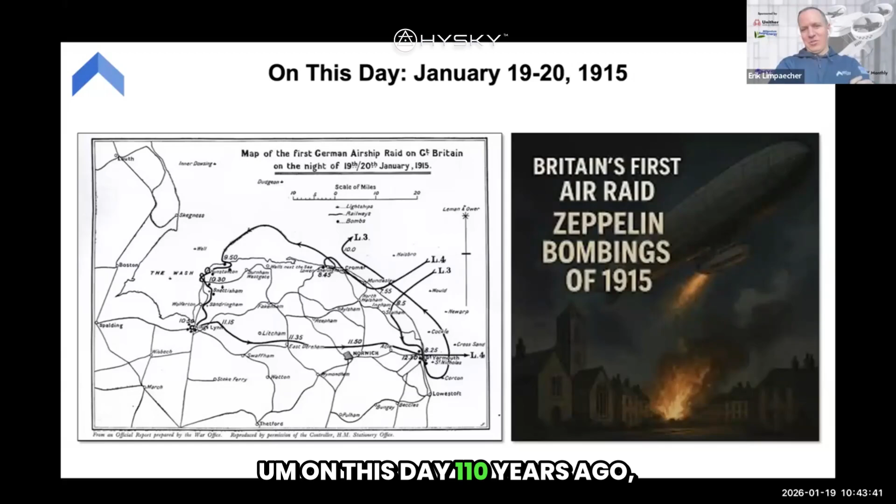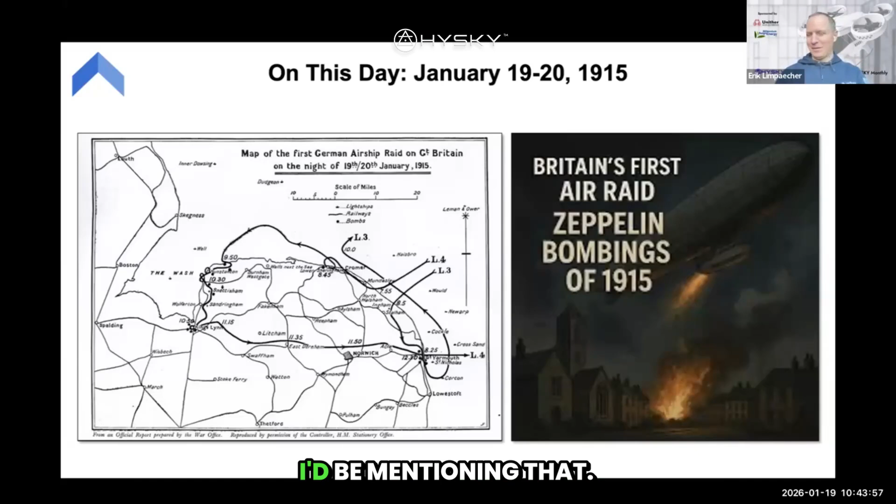And today is actually a pretty interesting, unique day in hydrogen aviation history. On this day, 110 years ago, was the first air raid on Britain from hydrogen-lofted zeppelins. So quite a coincidence, a little bit different than the MLK theme, given that we're focused on hydrogen aviation here. Thought I'd mention that. The use of hydrogen for lift gas has 160 years of history, dating back to the Civil War, where hydrogen gas generators were used to loft balloons for surveillance.

In the First World War, almost 6,000 hydrogen-fueled missions were carried out with these 2-person aerostats for artillery spotting and surveillance, and they transported the gas from French factories in these compressed gas cylinders. And then in the Second World War, the M1 hydrogen generator was used to loft these barrage balloons. You can see these over the beaches of Normandy. They were also lofted over Buckingham Palace in London during the air raids, checked against the aircraft, and they used caustic soda to produce hydrogen using these mobile hydrogen generators.

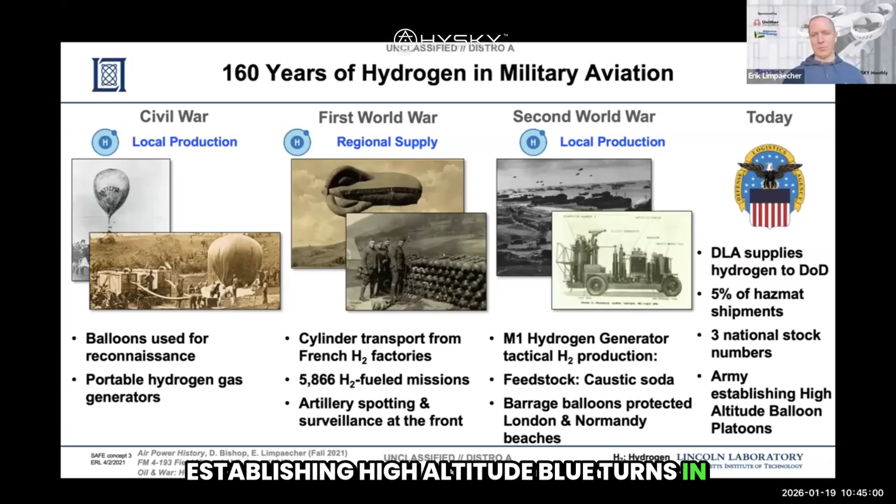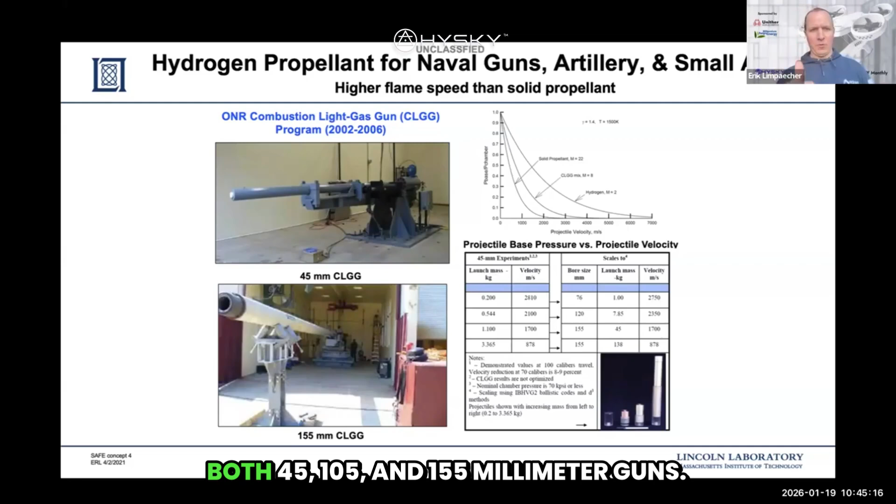And today, DLA supplies hydrogen to the DoD. It comprises 5% of all DLA hazmat shipments, and the Army is in the process of establishing high-altitude balloon platoons in both the Pacific and in Europe. But lift gas is not the only application for hydrogen. The Navy's developed combustion light-gas guns that demonstrated 30% higher muzzle energy by combusting hydrogen and oxygen for 45, 105, and 155 millimeter guns.

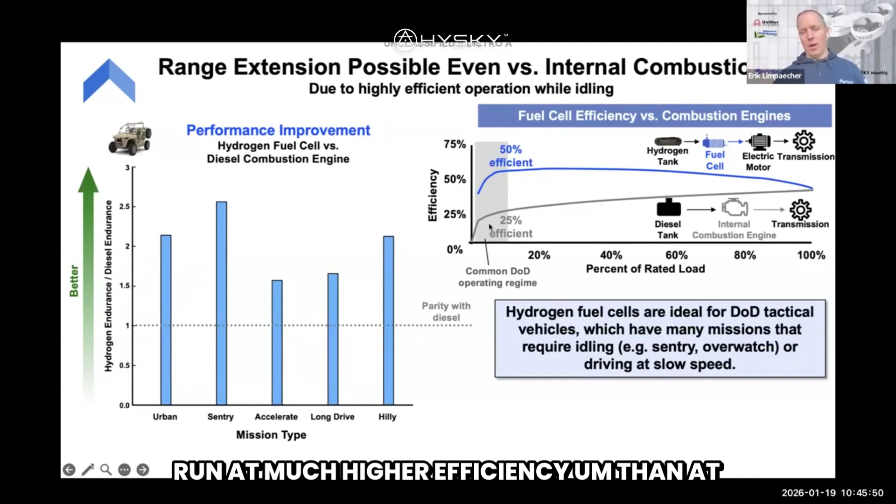Hydrogen has been demonstrated to provide significantly reduced thermal signature and acoustic signature compared to combustion engine systems. Through some analysis, we've also shown that hydrogen can provide significantly increased range compared to diesel-based combustion engine vehicles because hydrogen systems tend to run at much higher efficiency at lower operating load levels compared to combustion engine vehicles.

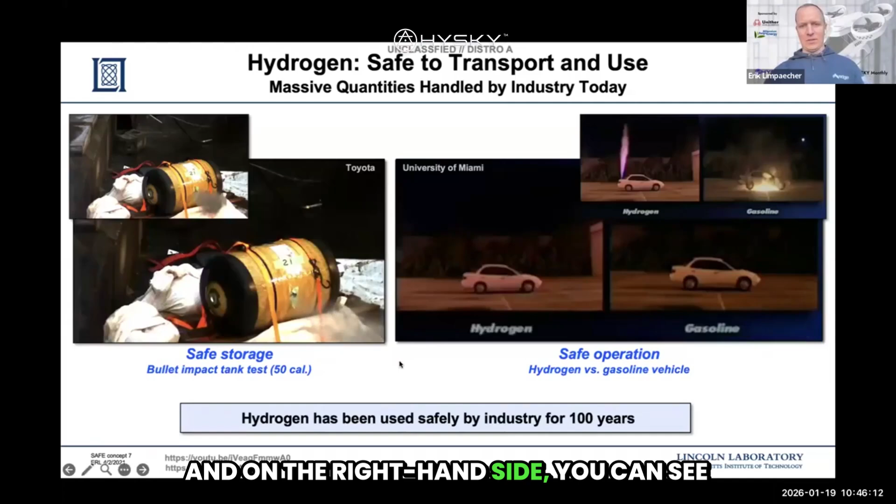Furthermore, hydrogen has been shown to be very safe. On the left, you see a video of a Toyota Mirai tank being struck by 50 cal, and you can see that the exhaust of the hydrogen actually prevents any ignition. And on the right-hand side, you can see some tests done by University of Miami showing that hydrogen, when handled properly, is actually safer than gasoline for vehicles. I'll let that video play for a second.

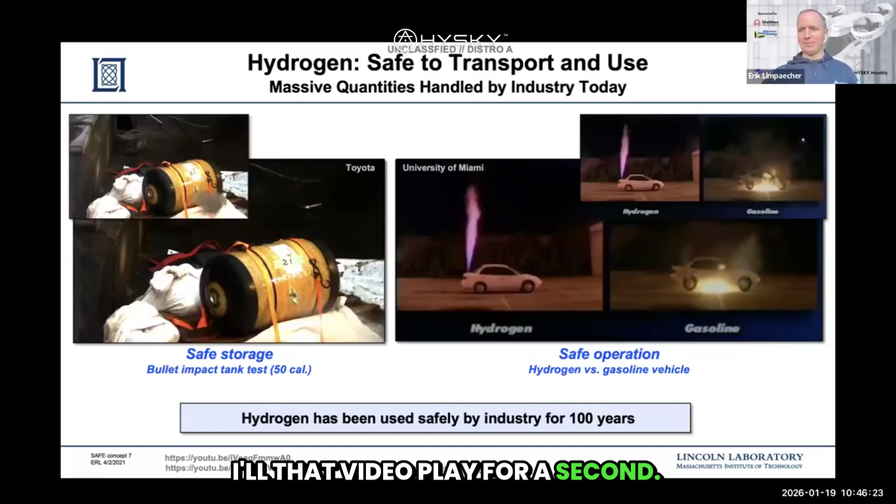As we look to other applications, as you all know, hydrogen has significantly higher energy capacity compared to batteries. So today we could see a 3 to 5, or further, 3 to 8x improvement in the flight endurance of UAVs. And I think it's interesting to compare that to the amount of improvement in battery energy density we've seen over the last 50 years. Right? Batteries have improved by 7x over 50 years, and today by switching to hydrogen, we could dramatically improve on the energy density of batteries.

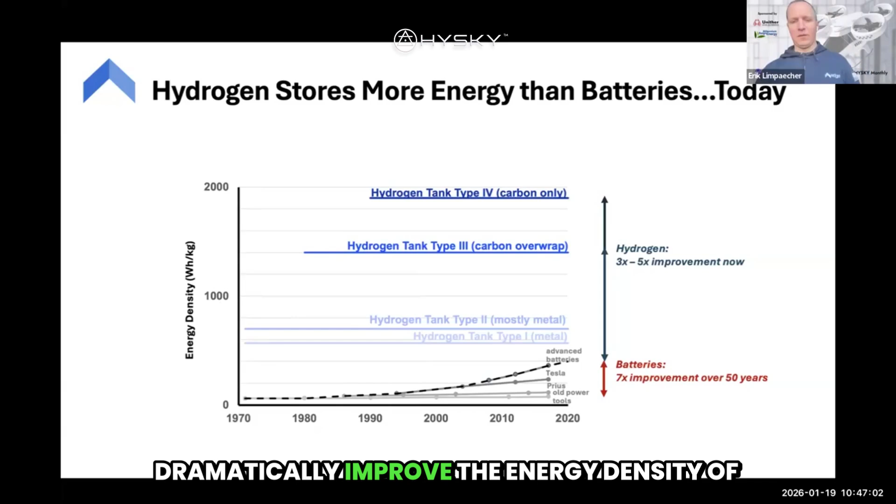Which is why there are so many companies developing hydrogen-fueled drones by removing the batteries and using that same battery electric powertrain to fuel hydrogen electric systems, as well as a pretty robust ecosystem providing battery to hydrogen conversion kits for primarily Group 2 and Group 3 UAVs. I've actually seen IAI and Skyton converting combustion engine Group 2 and Group 3 UAVs to hydrogen to improve maintenance and reduce acoustic signature.

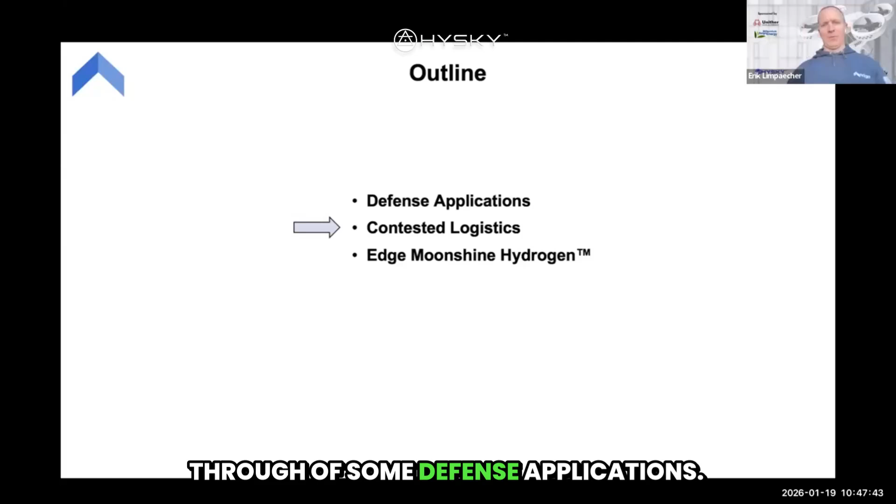So that's a quick run through of some defense applications. We've seen a lot of interest from Special Operations Command and the Army in contested logistics. And the basis for that is that petroleum has historically been a challenge for military operations and is frequently the first thing targeted by the adversary.

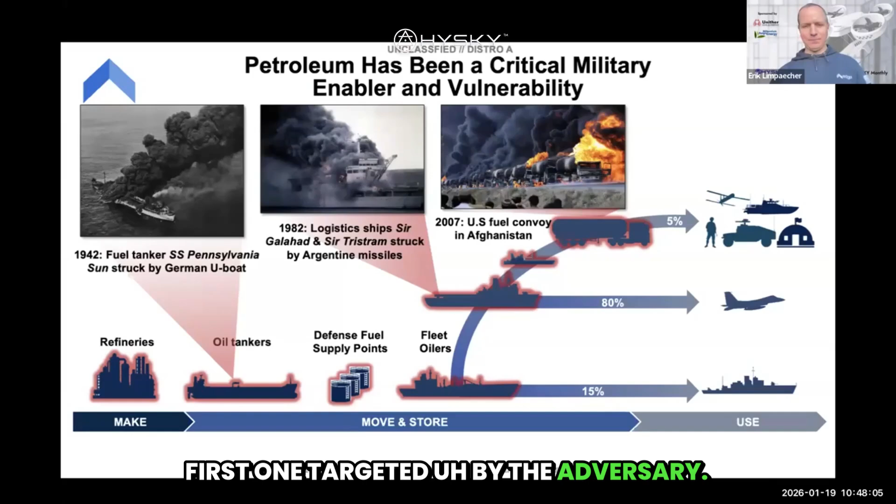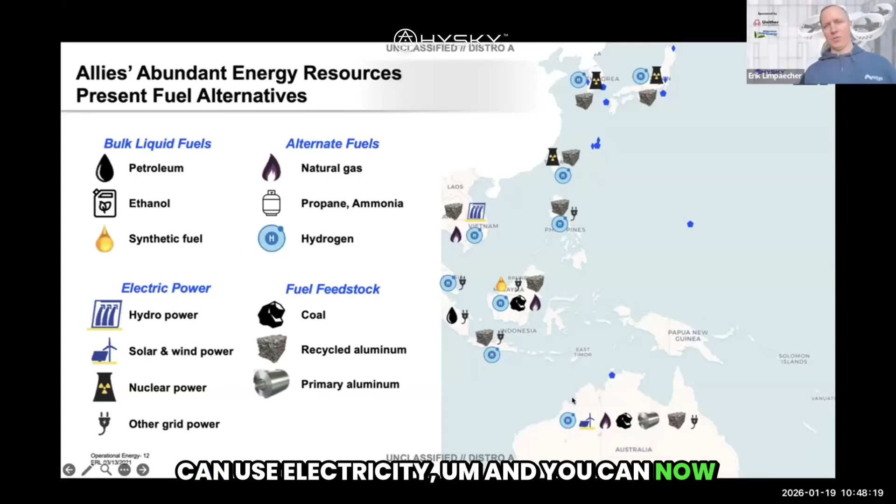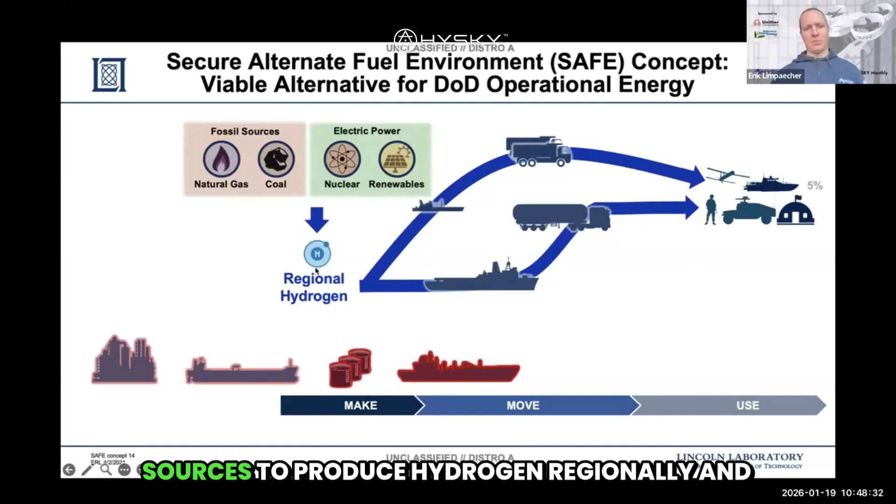Good news is that there are many other sources of energy in places where the U.S. military might want to operate, and many of those can be used for producing more hydrogen. You can use coal, you can use natural gas, you can use electricity, and you can now also use aluminum. So a potential solution to contested logistics is to use locally available fossil or electric power sources to produce hydrogen regionally and then transport it, or, operating at the tactical edge, you can now take aluminum, mix it with water to produce hydrogen on the spot.

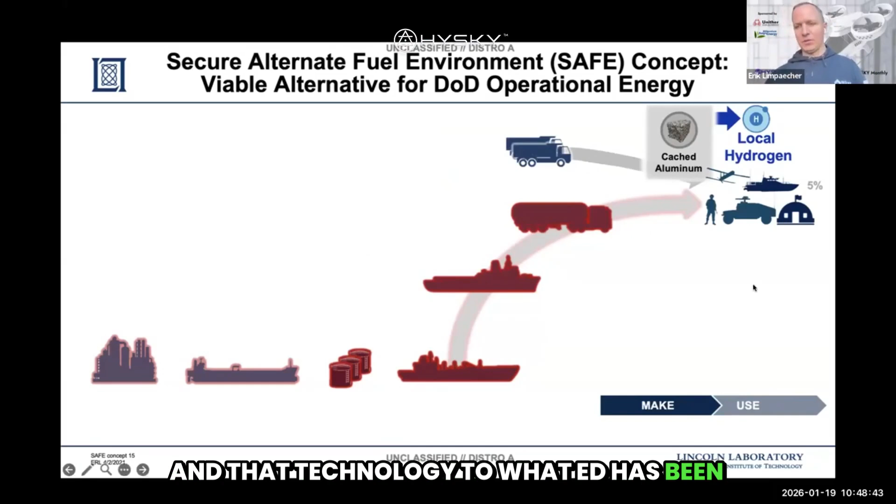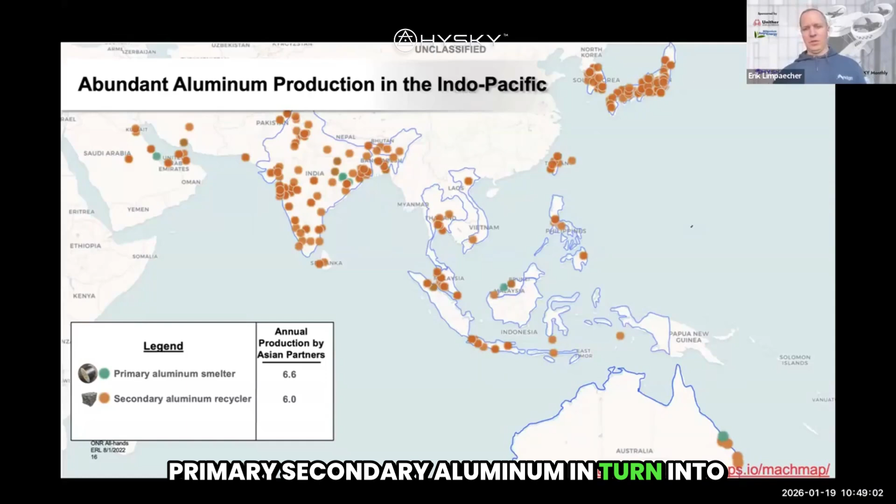That technology is what Edge has been focused on commercializing. When you look at the map, there's some pretty interesting use cases in terms of using aluminum as a sovereign fuel, the ability to take locally sourced either primary or secondary aluminum and turn it into hydrogen or a fuel source. And furthermore, given that aluminum is a globally traded commodity, there are large stockpiles in certain areas.

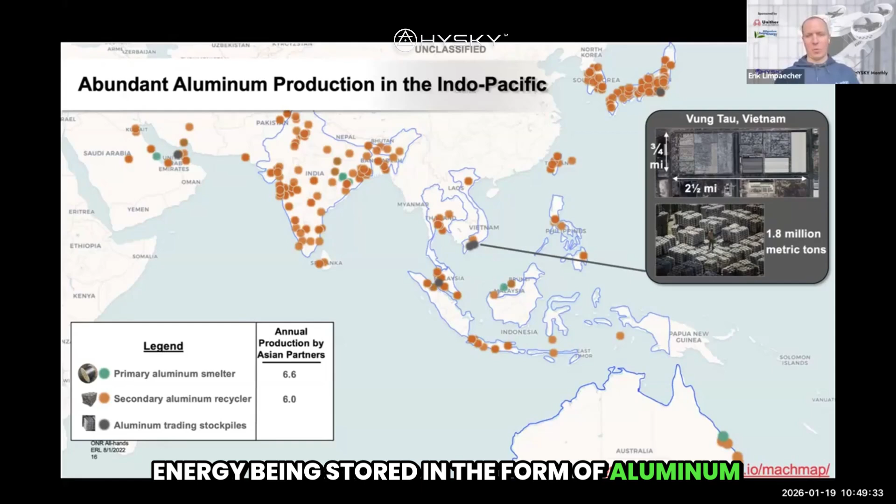This one site in Vietnam, which has an aluminum stockpile 2.5 miles wide by a mile deep and taller than a person, has as much energy using our technology as the entire Navy Red Hill fuel depot in the Pacific. So, significantly large quantities of energy being stored in the form of aluminum around the world, now accessible using our technology.

So when you compare aluminum-based hydrogen to petroleum, there's some significant benefits. We see about half the volume and about 10% more weight. You can use any type of water along with some additives, and because it's a chemical reaction, we can do the reaction in a pressure vessel. The pressure vessel produces pressure, and that system can then pressurize reverse osmosis to do water purification.

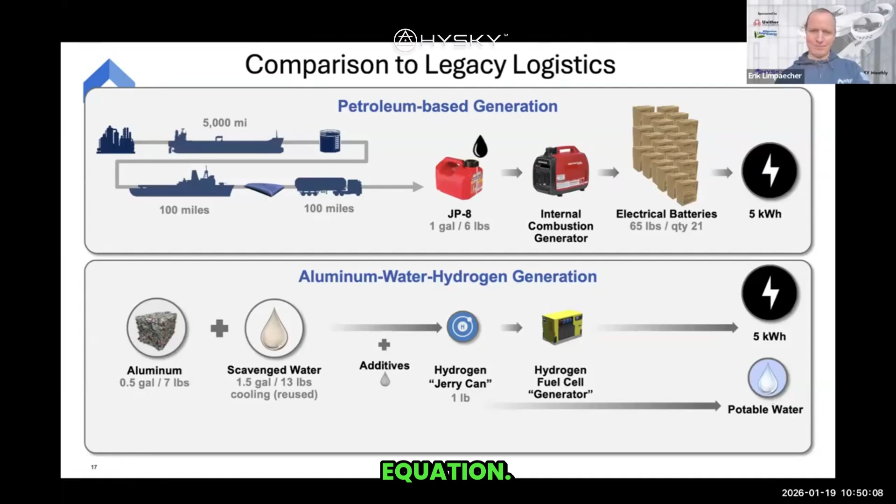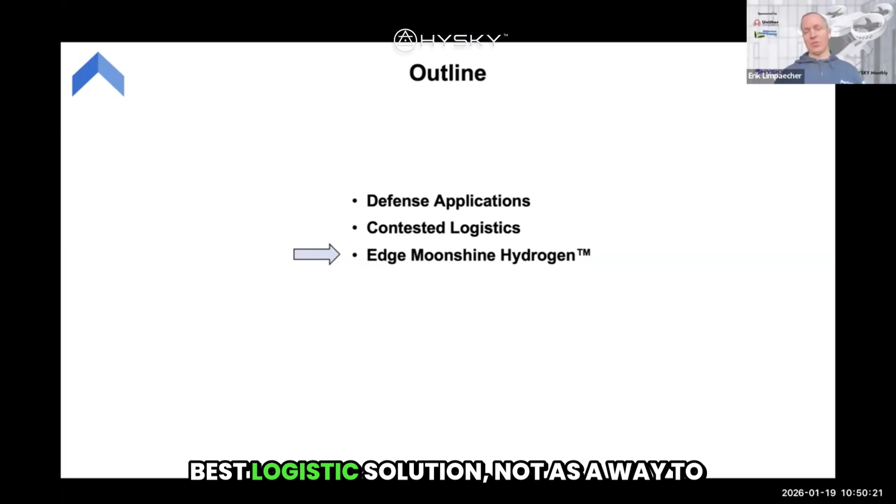So, quick run through as to why the Army and SOCOM and Marines are interested in aluminum and hydrogen specifically as a contested logistics solution, not as a way to replace diesel, but as a way to augment or increase the number of options that they have. So now I'm going to get into the hydrogen technology we've been developing to meet those needs.

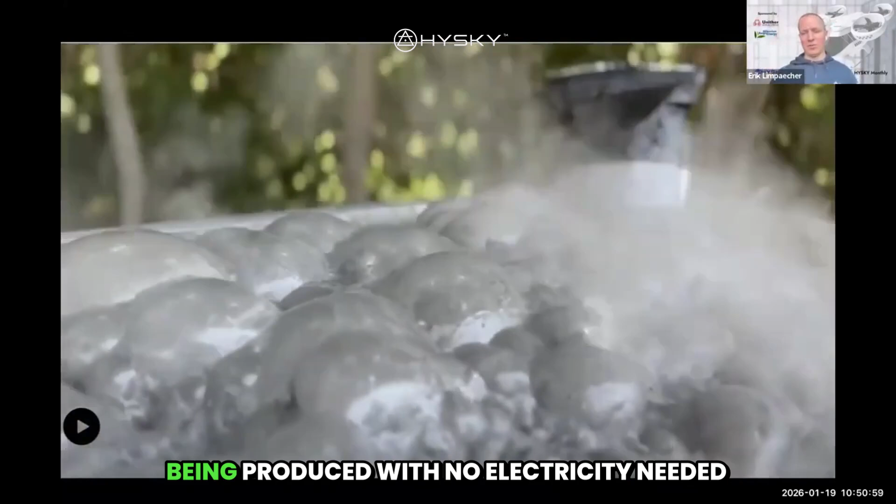So this video shows what's happening inside of our reactor. The aluminum has its oxide layer disrupted. That's why it doesn't look so shiny. And once it's exposed to water, aluminum oxidizes inside the water, rips the oxygen off the H2O to produce aluminum hydroxide. That's the gray material there, and then allows hydrogen to go free. So all those bubbles there are hydrogen being produced with no electricity needed and any type of water.

I used to have a Marine Corps colonel like to sabotage my demos by pouring hot coffee over the aluminum, and it'd start reacting, producing hydrogen using the water in the coffee.

We've done significant work on this technology at MIT Lincoln Laboratory. We've got exclusive license to over 10 patents from MIT. We did systems like the hydrogen tactical refueling point, which enabled a handful of Marines to produce hydrogen for fueling UAVs and powering a combat operations center, producing power for balloon launch projects and a number of other projects while at MIT from 2018 to 2024 when we spun out the company.

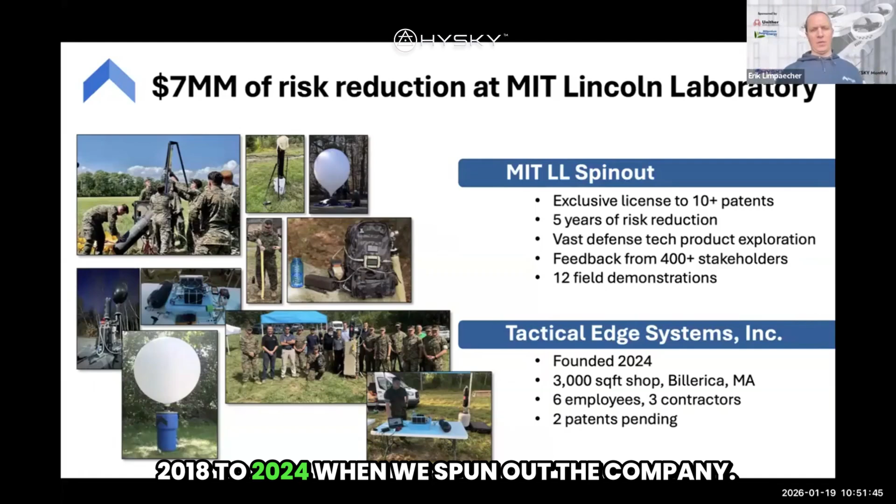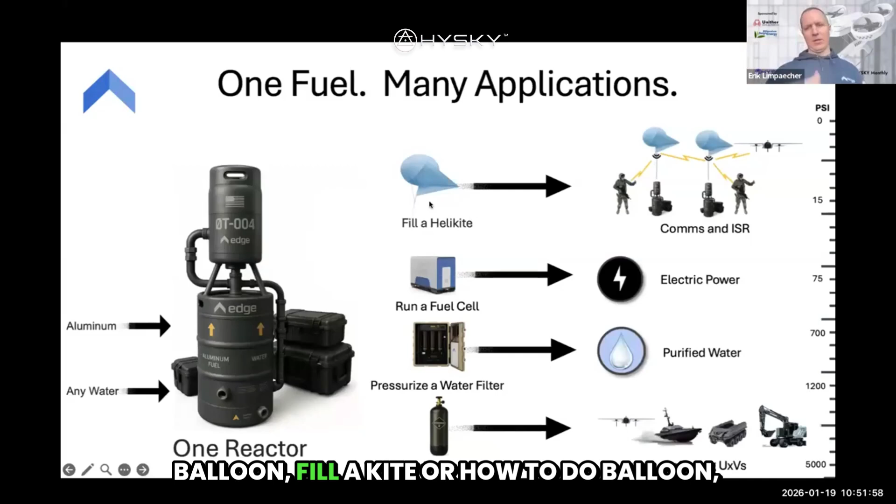So Edge is now commercializing this technology using one fuel for many applications. The simplest thing you can do is to fill a balloon, a Helikite or high altitude balloon, carry a communication relay up in the air and provide over the horizon comms and sensing. You can run a fuel cell, produce electrical power. You can use the pressure that's produced by the chemical reaction to pressurize a water filter for water purification.

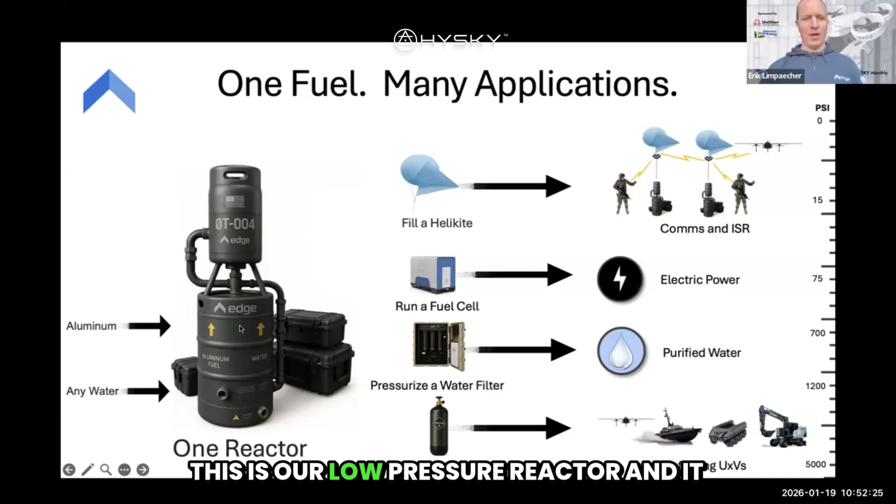And you can also self-pressurize up to 5,000 psi to refuel unmanned systems. So all the way from ambient pressure up to 5,000 psi are enabled by two reactors. This is our low-pressure reactor, and we're also developing a higher pressure reactor for expeditionary applications.

We group our work into three domains: air domain, which is aerostats and drones; ground domain, which is power generation and water purification; and maritime domain, where we basically take the ground power system, put it on a watercraft, and effectively build an ocean sipping watercraft, where the watercraft carries the aluminum and then can ingest seawater for the reaction. So the technology is as simple as pouring raw aluminum into the reactor, and then the reactor does all the mixing with water and thermal regulation in order to make the reaction work.

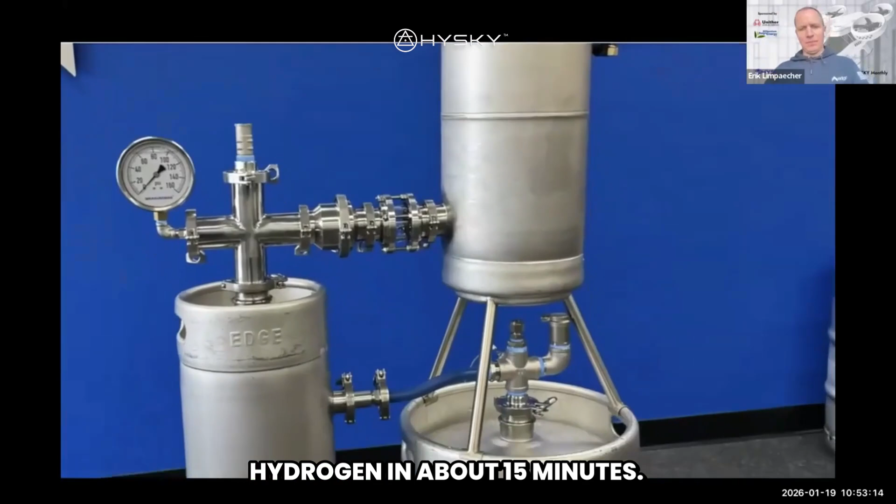So this is an early demo, or early test we did, producing several hundred grams of hydrogen in about 15 minutes. We've done as fast as a kilogram in 5 minutes. That was a very sporty reaction. This one shows a much more mobile system using environmental water.

So one of the earliest tests we did was we brought this to Michigan, Lake Huron. We participated in the Navy Silent Swarm exercise. We took water from Lake Huron along with aluminum, mixed it in the reactor in order to launch the aerostat. That aerostat then was able to integrate with a number of different communication payloads, both our custom developed Growler radio, which operates below the noise floor, using a LoRa-based network. We've also integrated with goTenna and Domo Tactical and Chatterbox.

All those systems are able to communicate over the horizon because of the additional altitude that we brought them to, which enables some pretty unique capabilities. Flying just at 500 feet, you're able to demonstrate 23 miles line of sight communications, where typically if you have a radio at eye level, you can only get about 3 miles. Best case. We also demonstrated multi-hop mesh communications by launching two aerostats and having multiple operators communicating with the entire AO of the exercise. And this technology was assessed at TRL-7 by the Navy.

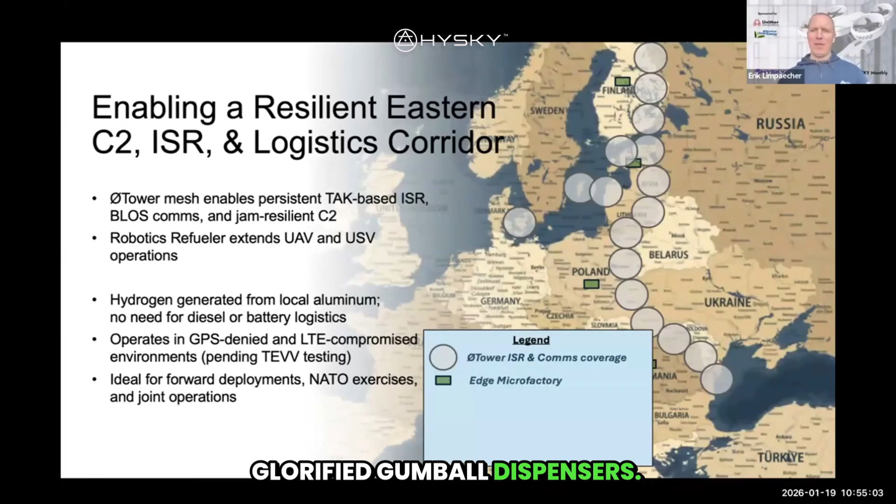Looking forward, based on that test, we were selected into the NATO DIANA program. And since then, we've been engaging primarily in Eastern Europe with the idea of building what we call microfactories. We can take locally sourced aluminum, chip them into usable pellets that our reactors can use, basically glorified gumball dispensers. And then that aluminum can be used to feed reactors that can launch aerostats for enabling wide area communications and sensing, as well as fueling of hydrogen ISR drones.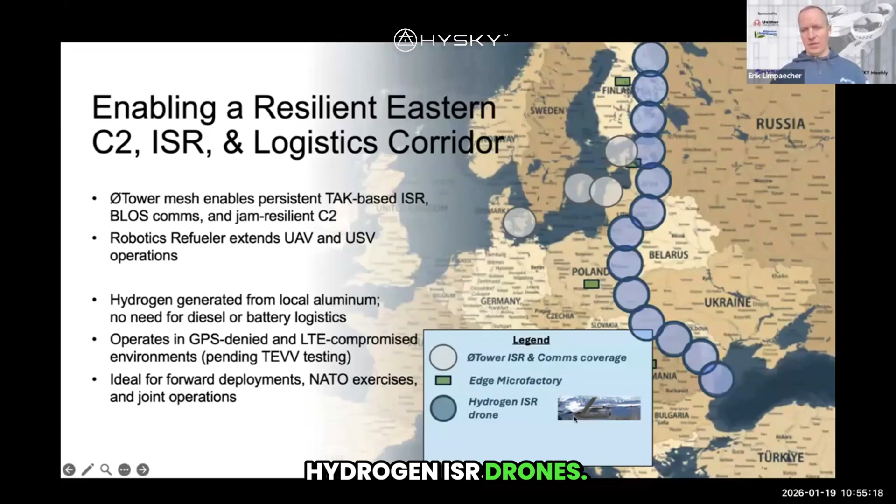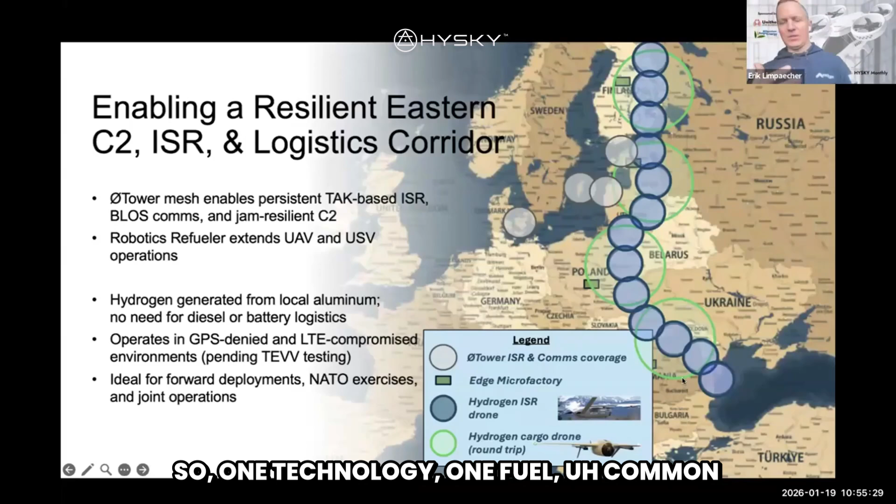This right here, for example, is the Zephyr Z1 for enabling cargo drones and significant range on those as well. So, one technology, one fuel, common set of reactors, enabling a range of applications in some interesting places of the world.

So looking ahead, we have several Special Operations Command contracts to develop remote power generation, water purification, and drone pressurized fueling. We're about to kick off an Army project as well. We're engaging with two program offices, both on the Army and the Special Operations Command for power generation. We are recognized as being the top 3% in technology solutions for Army contested logistics. We're top 1% of technology solutions for NATO DIANA.

We are currently standing up a launch operations team to operationalize our capabilities globally. We're engaging with a Pacific Island nation, a country in Africa, going to a remote island in the Southern Atlantic, as well as Eastern Europe. These include aerostats, high altitude balloons, tactical power, and drone fueling capabilities. Thanks to some of our investors, we're expanding into the mining, agriculture, and construction space.

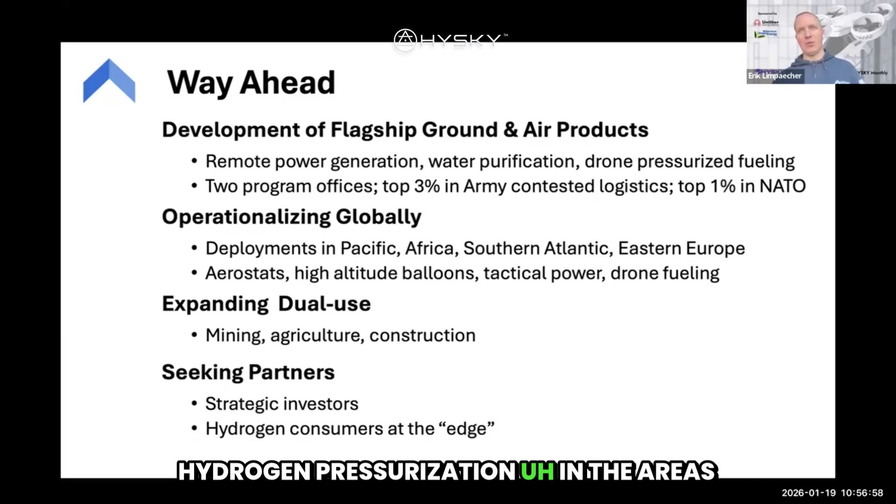So anybody who has needs for either sensing or communications or remote power, and we're seeking partners, both strategic investors and folks who may be on this call, hydrogen consumers at the edge. So if you're finding that hydrogen supply and hydrogen pressurization in the areas where you're operating are challenging, we'd definitely be interested in speaking with you.

This is definitely not a one-person show. The leadership team is incredibly talented. Mark has been developing autonomous systems for the past 25 years, from his work at MIT Lincoln Laboratory; he's also an instructor in robotics at MIT. He's developed unmanned systems operating under sea, on land, in air, and in space. He even developed a self-guided bullet. He's been the person who addressed all the challenges with aluminum fuel.

He advised two presidents in the White House, and he's been doing disaster response deployments throughout the world for the last 15 years. He's also the team lead for the Roddenberry Foundation Disaster Response Team, which is the philanthropic arm of the Star Trek franchise. And that's how he and I actually met. He's been managing government contracts for many years. So these are my co-founders. The team is small, but very nimble and fast moving, and look forward to your questions.

Awesome. So, in the chat we have a few, but I want to start by, well, first, thanks for sharing that because I've been curious about this technology. Many years ago, I was talking to some army guys. You might even work with them. They mentioned something about these pellets. I've heard about this aluminum kind of dust thing, and I didn't know if it was really real. So that's the first time I've seen a video like that. Thanks for sharing. I've always wondered if it was actually possible.

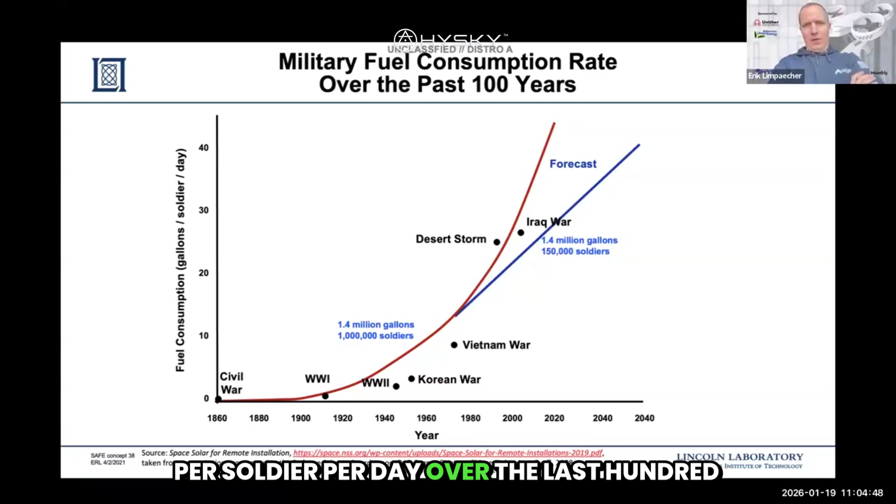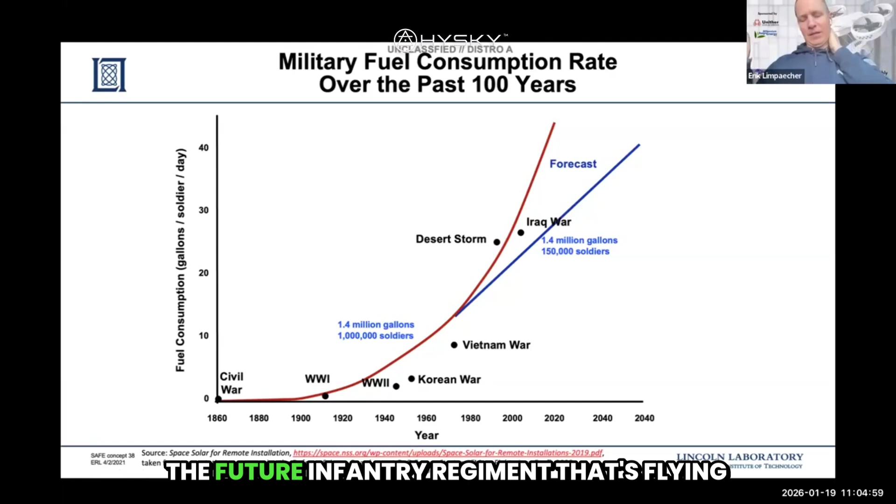So this shows the fuel consumption, gallons per soldier per day over the last 100 years. And the last data point here is in 2000. I would imagine if you plotted numbers for the future infantry regiment that's flying lots of drones, this number is going to be even higher.

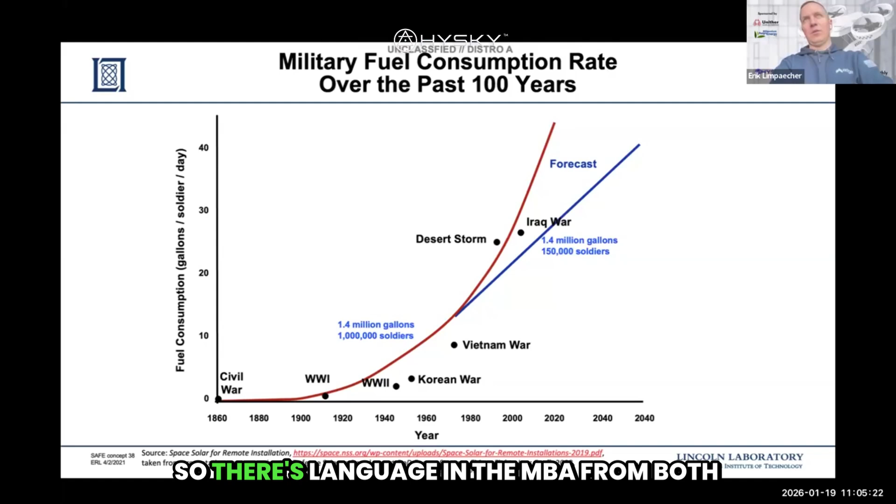And the fact that more and more of this fuel consumption is for electrification, and combustion engines are not particularly efficient at producing electricity, while hydrogen is highly efficient at producing electricity, we see this as a problem that is not going away. So, there's language in the NDAA from both the Army and Marine Corps about hydrogen-based solutions.

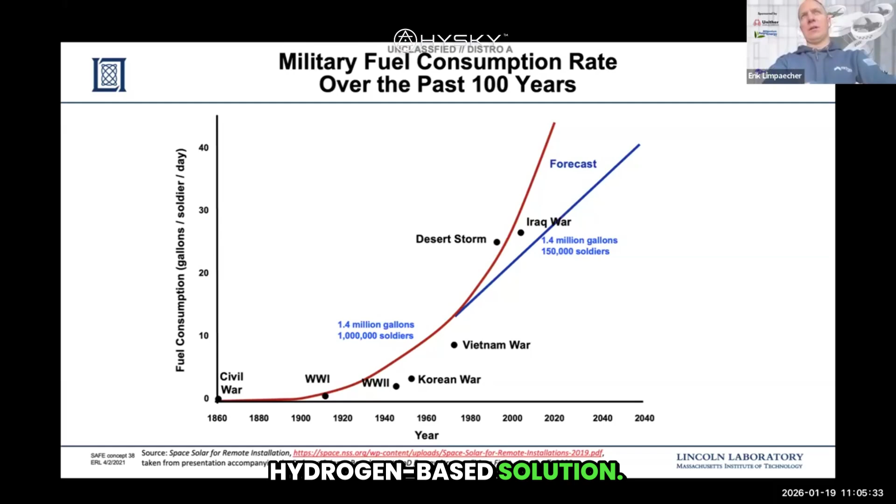Program manager for mobile electric power and Marine Corps power team are both interested in hydrogen-based solutions. They've already adopted battery-based microgrids. We think that for technical, logistics and operational reasons, there are many forcing functions that are causing the military to look to hydrogen to help them solve their battery and fuel challenges.

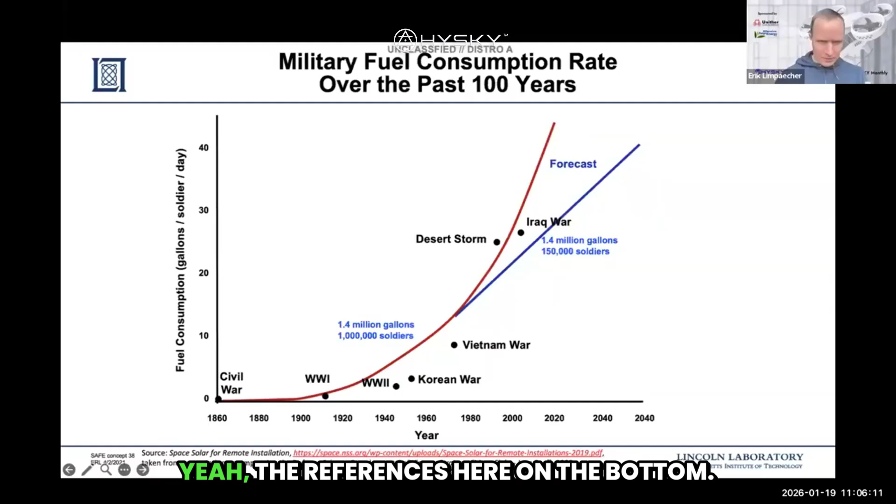Thanks so much. Can I answer your question? Yeah, thanks so much for sharing. That slide was very interesting. Where did you guys make that, or was that from a paper? Where did that come from? I'd love to dive into that a little bit more. Yeah, the reference is here on the bottom. Could you put that link in the chat?

Sure. Okay, next up we have Hermit Badness. Hermit, I apologize if I'm not saying your name right. Very good question. Would you like to come on and ask your question? Eric, thank you very much.

Really appreciate this presentation. I'm with the San Diego Airport, and we're looking at several options for alternative power. One is emergency power at times when we anticipate there will be some sort of energy blackout. So we use diesel generators. That's what we use, and I believe that's the standard. And I don't know how this could potentially replace diesel generators for emergency power to power our terminals.

That's the first thing. The second is we're also using a significant amount of solar to power our terminals as well. So on a per square footage basis, we know how much energy we can generate via solar, but how would we replace solar with aluminum fueled hydrogen, and how much energy would we generate, maybe not on a per square footage basis, but on a per pound of aluminum.

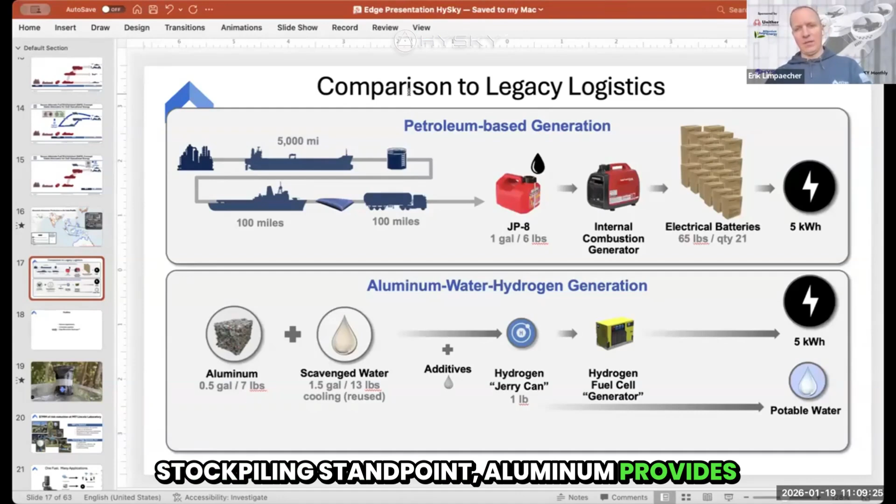Also, the construction industry is interested in aluminum as an energy source because of reduced noise emissions and reduced particulate emissions. Right, there's almost no noise emissions because the chemical reactor and the hydrogen fuel cell are nearly quiet. And there are no particulate emissions either. So, from both an EPA standpoint and a backup energy stockpiling standpoint, aluminum provides significant benefits compared to petroleum.

And as long as you're looking, it's challenging for us for a new energy technology to compete against electricity and diesel that has had over 100 years to climb down the cost curve.

But if you're using it as a backup power source, it can provide significant benefits at a comparable or competitive price compared to petroleum. So you'd asked about backup power. What are the other two questions?

You talked about fleets. So we are working on the robotics refueler, the system that self-pressurizes the hydrogen to 5,000 psi or higher. Our initial target is for drones, but we have been talking to various manufacturers of construction equipment who are looking to reduce the noise emissions and pollution emissions of their vehicles.

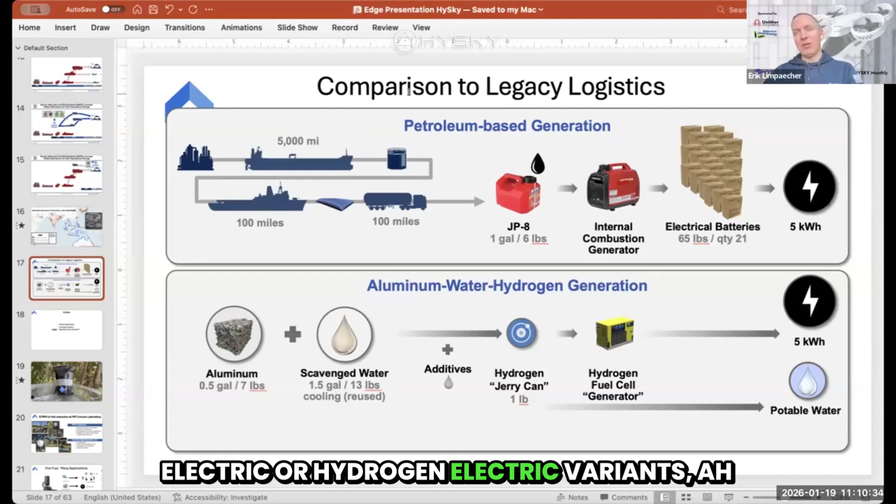I would imagine that the same would be true for aviation ground fleets. I don't know what the status is in terms of those manufacturers providing battery electric or hydrogen electric variants, but those are different options. I think those are two of your questions. What is the third one that I missed?

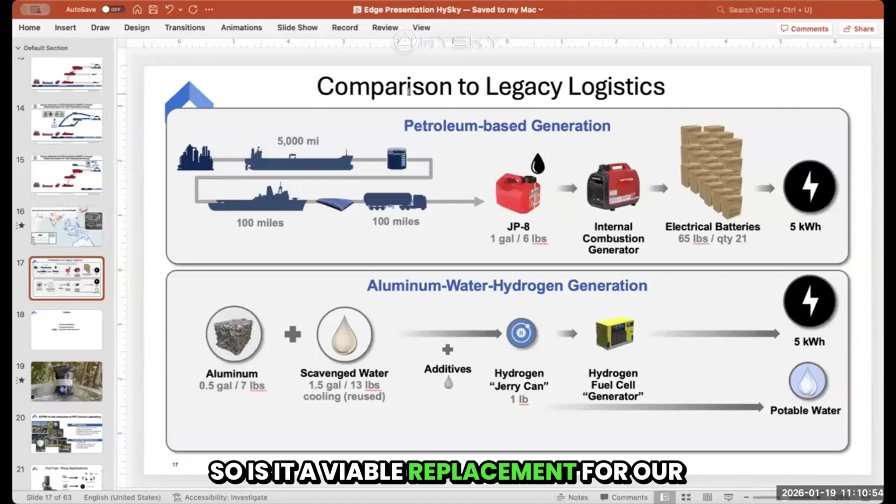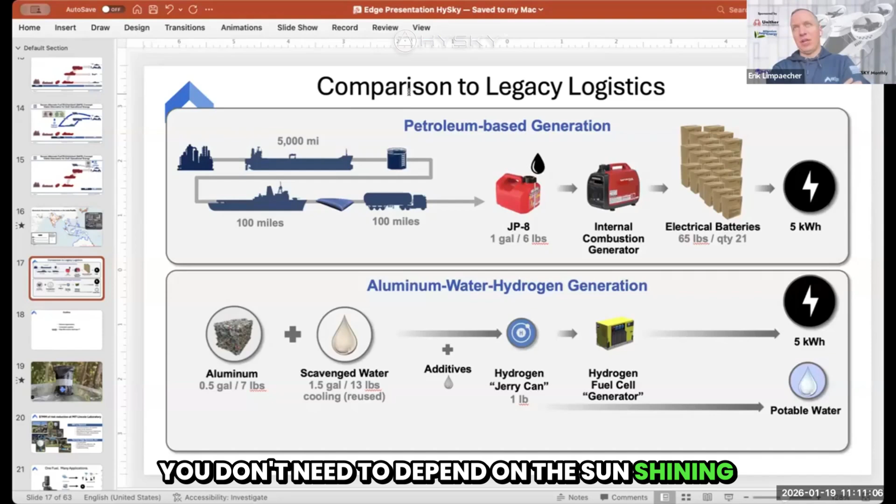Using aluminum-fueled hydrogen as a replacement for solar power for our aircraft, our building terminals. So is it a viable replacement for our existing solar? Yes, in the sense that you can produce aluminum-based energy at any time. You don't need to depend on the sun shining or the sky being clear.

Once you make the solar investment, electricity is effectively free, so it's hard to beat that. But if you're looking to expand your capacity or looking for energy that's available 24/7, it definitely provides benefits compared to solar in that regard. Great. Thank you very much.

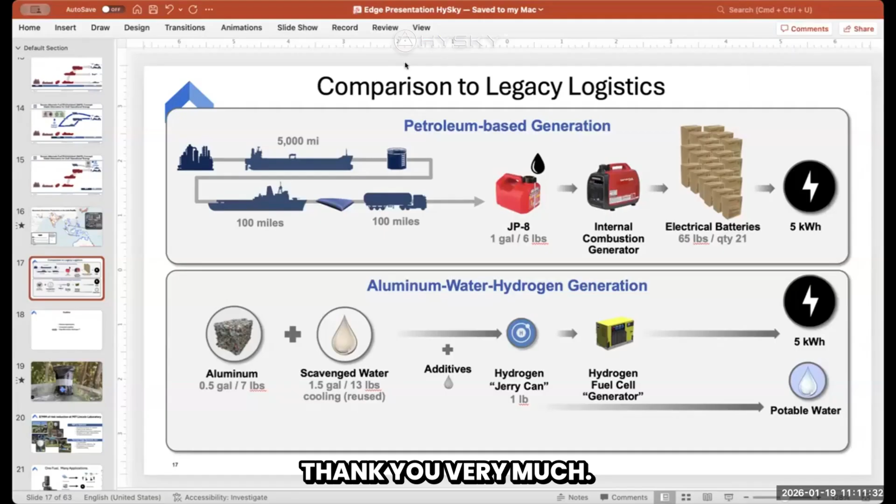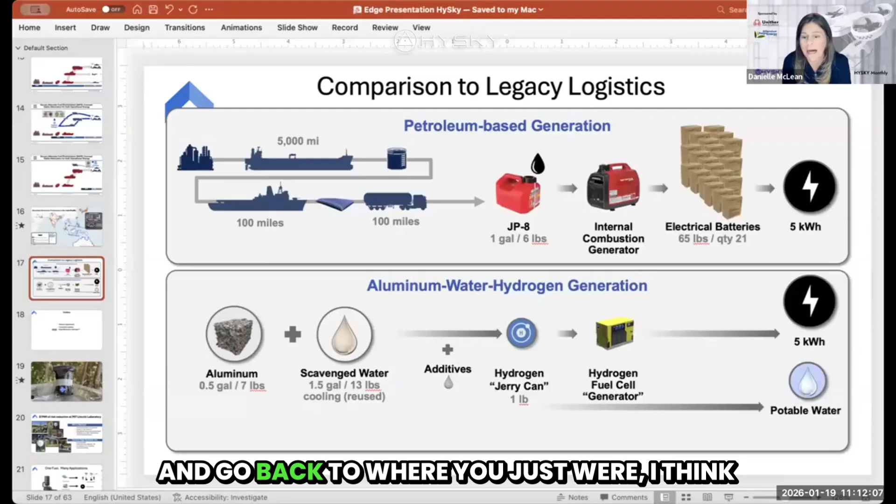And while we're waiting for Matt, Eric, could you share your screen again? I'm just going to nerd out for a minute because I really want to understand how this works. If you share your screen and go back to where you just were, I think it was like 2 slides after this. Okay, right here. Could you explain, what's in the bag?

So this is actually a demonstration of what we call our Generation 1 fuel, where we disrupt the oxide layer. Like the aluminum isn't shiny like it typically is. That aluminum oxide, that aluminum rust, is what prevents it typically from reacting with water. So you have an aluminum soda can or aluminum spoon. They don't react with water, but they get that shiny silver aluminum oxide.

With our Generation 1 fuel, we strip away or disrupt that oxide layer, and that makes the aluminum water reactive. This video is showing that Gen 1 fuel because it produces the hydrogen immediately, and you can visually see it. Since then, we've improved our technology. Our Generation 2 fuel does not require those pre-processing steps. Now you can just pour raw aluminum into a reactor like we showed here, and along with a small amount of additive, it mixes it with water and turns it into hydrogen.

But it works on that same principle where you disrupt that oxide layer so that when you pour the aluminum into the water, since aluminum likes oxidizing, it'll oxidize with the H2O. It'll rip the O off and allow the H to go free.

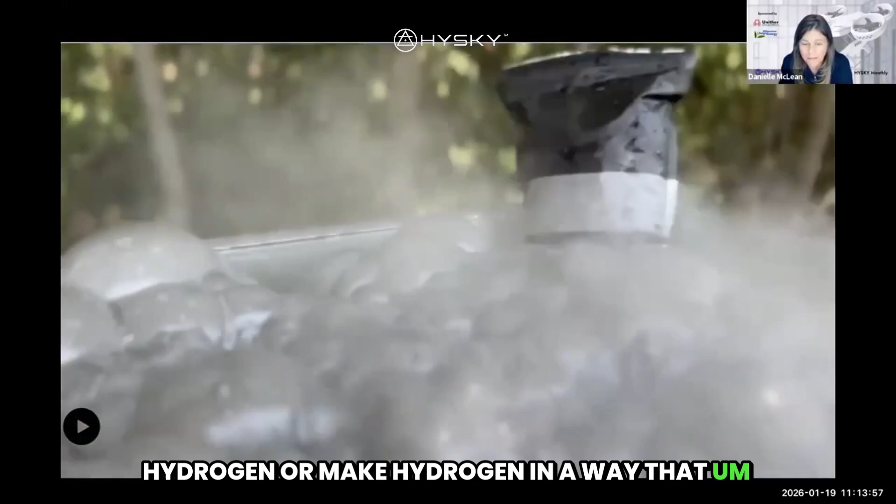So interesting. This might be a silly question, but I'm always curious about ways that we could store hydrogen or make hydrogen that maybe doesn't need to be liquid or cryogenic, subcooled. Would it be possible to generate this hydrogen on board an aircraft, or would that require too much additional, then you need your reactor and water, etc.? Have you guys looked into that? Yeah. So the challenge is the water. Water is heavy.

That's why when we illustrate our air, ground, and maritime systems, for the air system the reactors on the ground basically act as a mobile gas station. The ground systems produce hydrogen and it's all consumed on demand. As soon as you produce it, the fuel cell consumes it and produces electricity. But maritime is what you were envisioning, where you have the reactor on board the platform. It carries aluminum, and it can ingest water from the environment and produce hydrogen on demand.

And then you guys make the pellets, correct? Yeah, that's a fairly straightforward mechanical processing step. We make the aluminum. What's the energy requirement? So total all-in energy to take the raw aluminum, let's say in some form factor like some sheet, process it, put it through our reactor. The water pumps operate, those consume a little bit of electrical power, and then produce electricity through the fuel cell. All in, we consume about 1.8% of the energy that comes out.

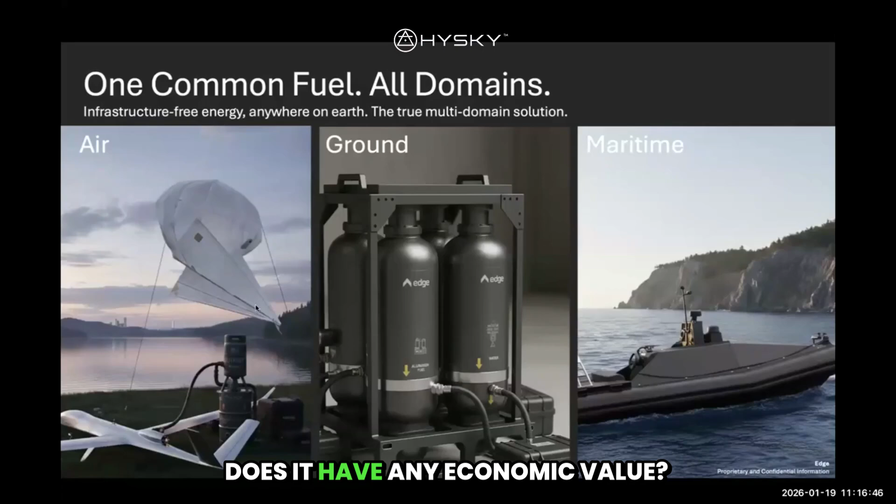So, two questions. One, there's a residual aluminum oxide that's left over. Does it have any economic value, or is it contaminated to a degree that it is simply disposed of? Yeah, so we're producing aluminum hydroxide, which is actually the main ingredient in antacid medicine. So in theory, it could be a medical product. We're not necessarily producing at the purity we'd want to have it be put into pills. But it is benign. We've run EPA TCLPs on it, and EPA has found that there's nothing hazardous or toxic in it.

Because it is effectively going back to producing bauxite, it's effectively dirt. So at some locations where we've tested, we've gotten permission to dispose it on the ground because it effectively turns into dirt 24 hours later. It could be used in some cases as a fire retardant, like in gypsum boards, you could use aluminum hydroxide instead. Or, since it's slightly basic, it could be used for deacidification, so people are looking to use it to deacidify coral reefs and those sorts of locations. So there are potentially some secondary economic value streams for it, but typically we treat it just as a waste and dispose it in your municipal waste stream.

Okay. And my second question is, what is the advantage of the aluminum water hydrogen fuel cell versus the aluminum air battery? What advantages do you see? So the aluminum air battery produces electricity natively, and that's the only thing it does. With our technology, by producing hydrogen first, you now have options as to what you do with that hydrogen. You could use it to produce electricity. You could pressurize it to fill a drone. You can use the pressure to do reverse osmosis. Because we're producing hydrogen, not electricity, it provides a different set of options in terms of how to use it. Very good. Thank you.

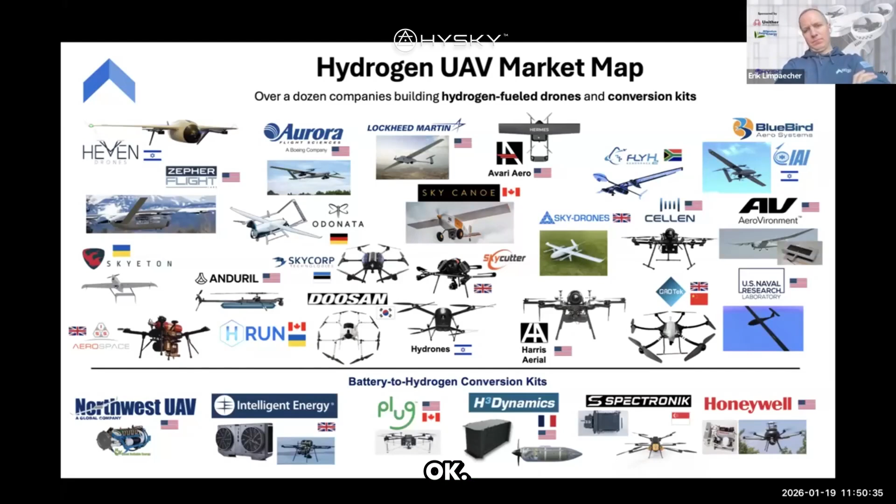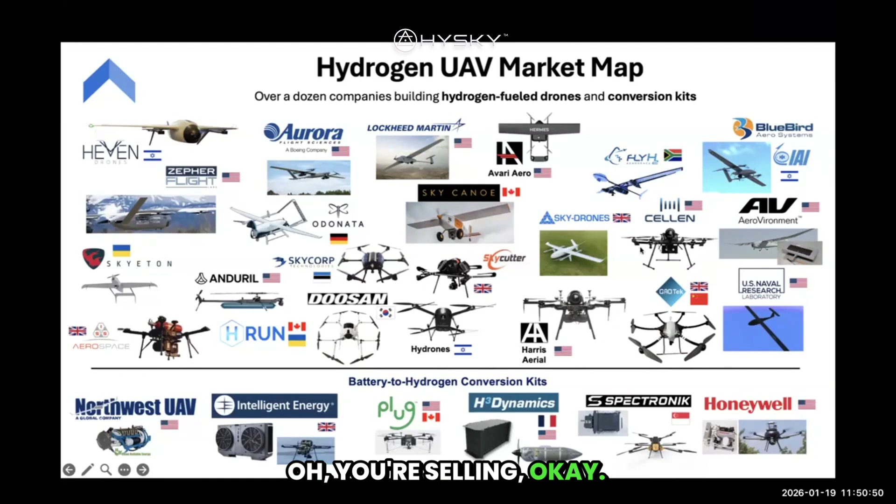Okay. Awesome. Thank you for all the answers, and we'll chat soon. Sorry, I missed what is your company? Cellen right there. Oh, you're Cellen. Okay. We have met then, maybe. Via email, yeah. We're missing a call, which I'll email you for as well. Okay, yeah, we'd love to have you on here. Thank you both. Thanks for all the questions. Thank you so much, Erik, for your presentation. Thanks to Edge. I've learned a lot. I have a lot more questions.